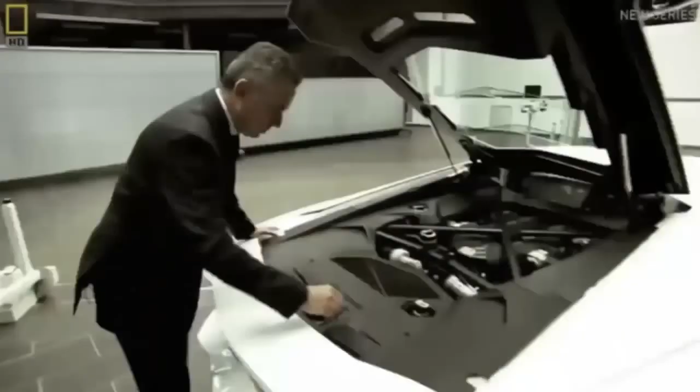It's Aventador's battling spirit that Lamborghini's development team must channel. In 2007, they're faced with the daunting task of creating a supercar that sets the standard for all others. Maurizio Reggiani, head of research and development, realizes that the only way of doing so is to take a step into the unknown.

We had to completely redefine the car, to start from a blank sheet of paper, and on this sheet determine, for each function, all that was needed to ensure that we'd have the best car in the world, to completely redefine what constitutes a super sports car.

To start from a completely clean slate is extremely high risk, and it's up to Reggiani to convince the board that it's the right thing to do.

This was one of the hardest things. Why? Because the project we were presenting had nothing in common with the old Murcielago, not with anything that existed in production at all. So it really meant beginning from scratch, with all the risks that come with that.

But the board decides the risk is worth taking. At the end of the day, they understood very well, because this is, again, about what Lamborghini is all about. Now, to recreate and to be always revolutionary in the approach.

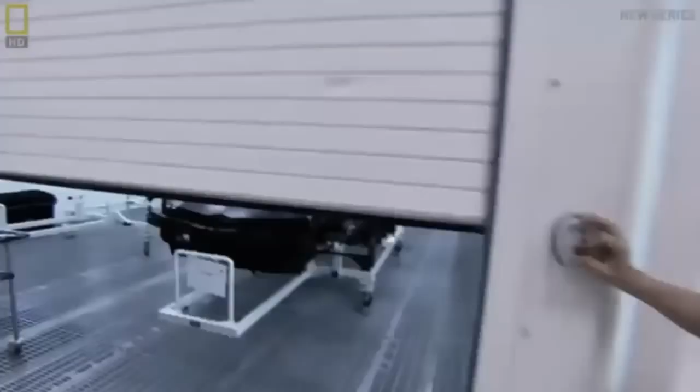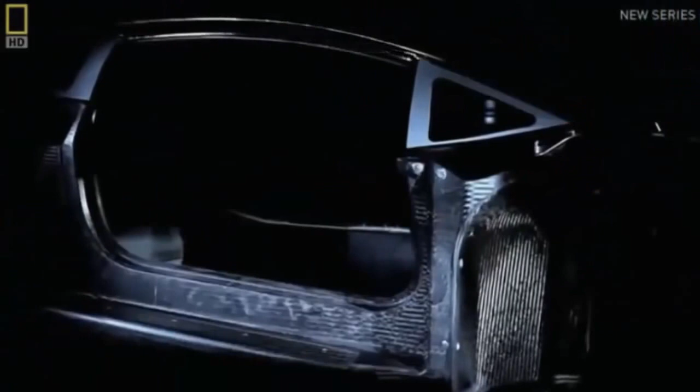The spirit of innovation is apparent in every fiber of the Aventador, as Lamborghini know that the fight to stay at the top won't be won through half measures. And nowhere is that combative approach more apparent than in their focus on lightweight construction, which they've taken to new levels with an entirely new concept for road cars, a full carbon fiber monocoque.

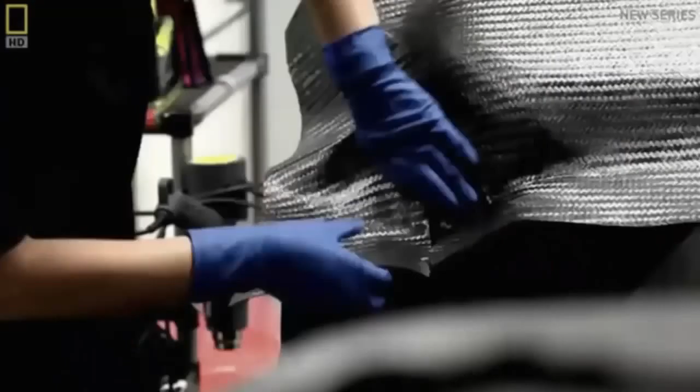These structures are common in racing cars, but the high cost of materials and laborious production methods have made them unavailable to supercar manufacturers, who've had to combine carbon fiber with cheaper, heavier elements, such as aluminium. That is, until now.

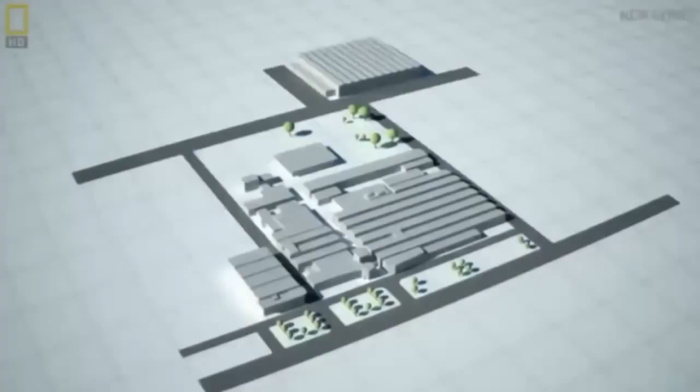The development team has devised a method that allows this race car technology to be mass-produced. But it requires a specialist facility that's up to the task. So in 2009, they build a whole new Megafactory just down the road from the company headquarters, devoted to constructing the Aventador's unique carbon fiber body.

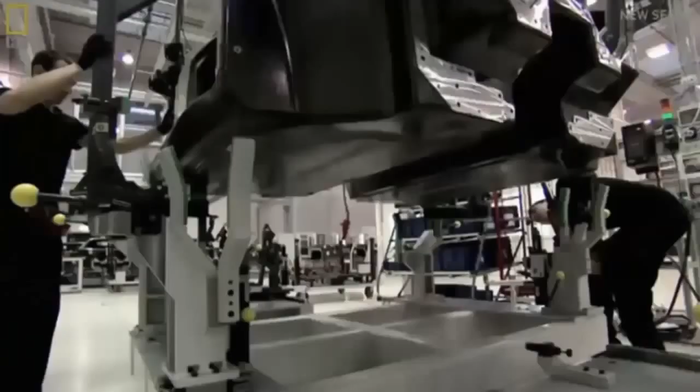Weighing just 147.5 kilograms, it helps make the Aventador significantly lighter than the Murcielago, considerably improving the all-important power-to-weight ratio, and in turn, the handling.

Lamborghini hopes that this innovation will stave off the threat by the new wave of rival companies. Lamborghini knows well what it's like to be the cocky young upstart, vying to unsettle the established names, as that's how it began almost 50 years ago.

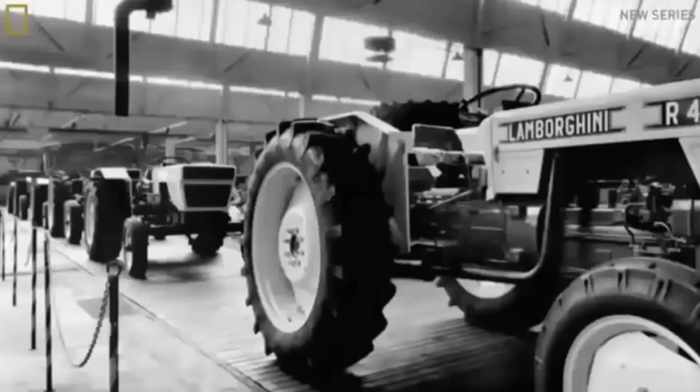The man upsetting the status quo back then was the company's founder, Ferruccio Lamborghini. He had made a fortune from a tractor manufacturing business and used some of his money to satisfy his love of sports cars.

According to Lamborghini legend, when he went to Ferrari to critique some of their parts, his views were dismissed. He got a negative response out of some requests he had and proposals to make a better car. And so he said, I will found my own company and I will create the best super sports cars ever.

He established Automobili Lamborghini in 1963, and for the next few years he toiled furiously to achieve his goal. The cars he created were well received, but it wasn't until the launch of the iconic Miura in 1966 that Lamborghini really made its mark.

The tractor maker had succeeded in breaking into the exclusive world of supercars with his bold new enterprise. Almost 50 years later, despite having joined the ranks of well-established sports car manufacturers, the company still strives to be edgy and uncompromising.

As demonstrated by its approach to the area it believes will define the future of sports car engineering: lightweight carbon fiber construction. The company's relationship with carbon fiber goes back as early as the 1980s, when it created the Countach Evoluzione, a concept car which experimented with the use of composite materials.

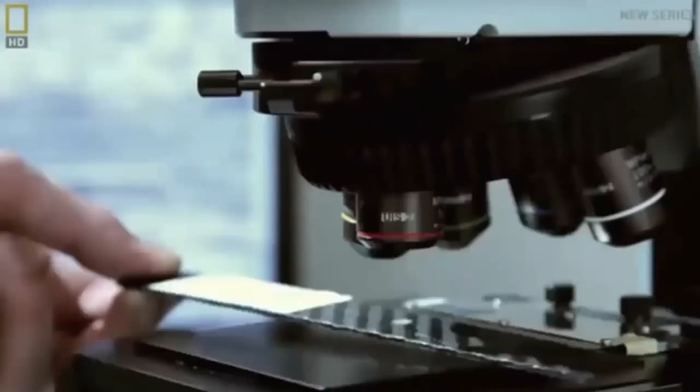It was dreamt up by the newly formed Composites department, whose successor has made many inroads into research and development of lightweight composite materials. And discoveries made here mean that next door, the company has been able to construct its new carbon fiber production facility.

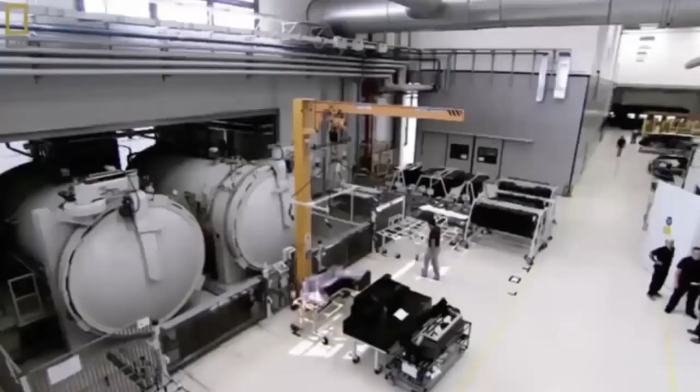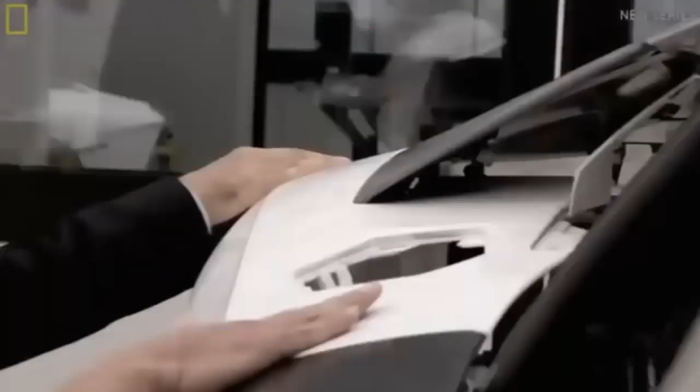The man given this task in 2009 is Ranieri Niccoli, Industrial Director, and he must devise it completely from scratch. When we designed and built this factory, we didn't have any automotive benchmark. We were the only one in the automotive business to build and run this kind of technology.

So they have to look elsewhere for inspiration. We looked to other sectors, for example the aeronautic sector, then we adapted and modified their process to fit a Lamborghini production system in order to build our car.

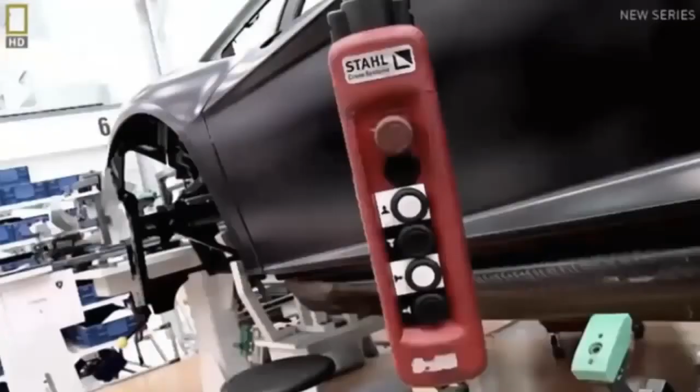The result is 500 square meters of new production space, known as the CFK, devoted entirely to sculpting the Aventador's super lightweight monocoque. Here, 146 carbon fiber specialists toil day and night to create 4 complete monocoques every 24 hours.

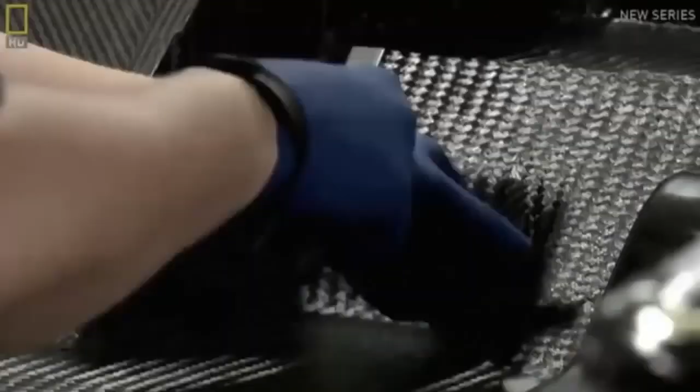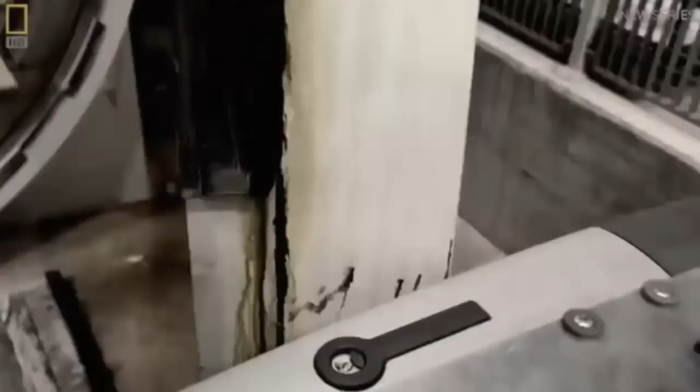To achieve this target, engineers have developed a unique production system. All materials are first cut by an automated machine before being sent for preparation. The material is placed into molds and laminated in a vacuum bagging process which forces the layers into shape, before being cured in a large pressurized oven known as an autoclave.

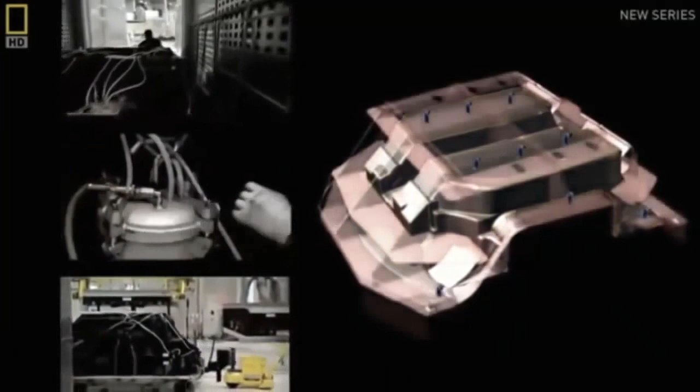Meanwhile, the production of other parts of the monocoque is underway, as operators fine-tune and cut more layers of carbon fiber with the assistance of precision lasers. A special oven is used to inject resin into the carbon fiber mats, which transforms them from soft sheets of cloth-like material to a strong, rigid structure.

After all these processes are over, the 2 key sections are finally recognizable: the base section, known as the tub, and the roof. They're placed in an automated machine, which drills them with holes allowing for attachments to be made later.

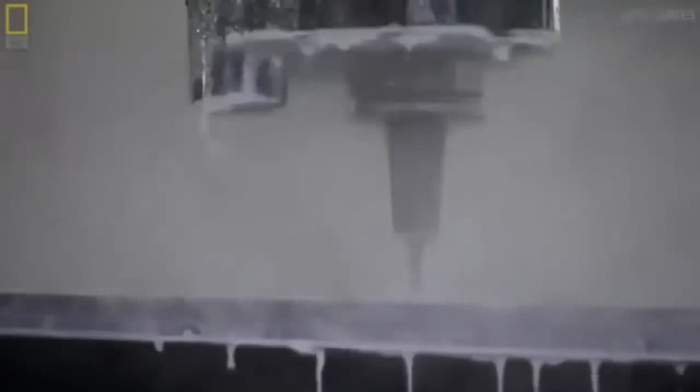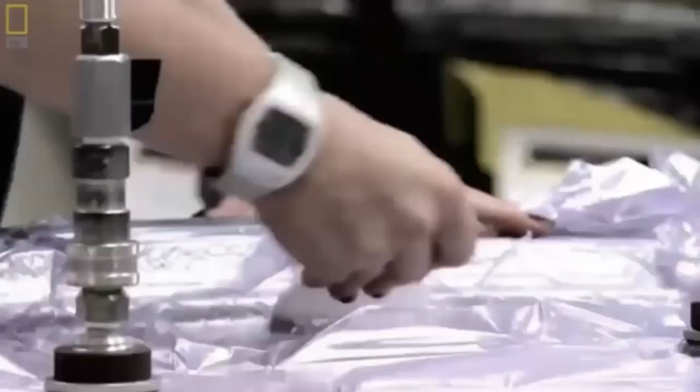Throughout the factory, computer-controlled machines share tasks with human specialists, a partnership that's integral to the Lamborghini production process. The main priority of our plant was to follow the Lamborghini production system, with a high degree of craftsmanship, high degree of skill, people, combined with technology, with an automatization process. This was the main challenge that you can also see in our plant.

Aeronautic-inspired engineering is ingrained in many aspects of the Lamborghini CFK production process, such as this stage, known as the Harmony Hammer Test. In this quality control test, an operator strikes the monocoque section with a specially designed hammer and allows it to vibrate, listening out for areas where air might be trapped in the carbon fiber shell.

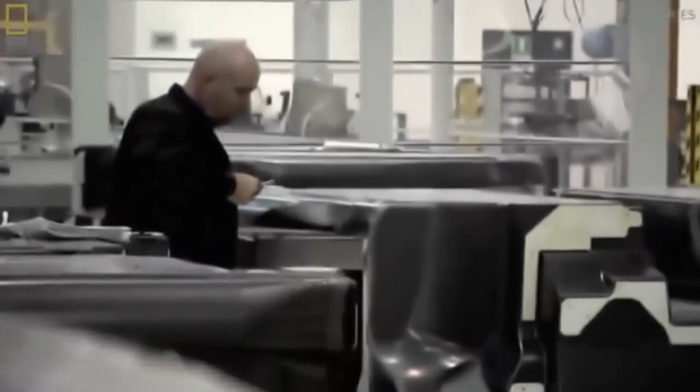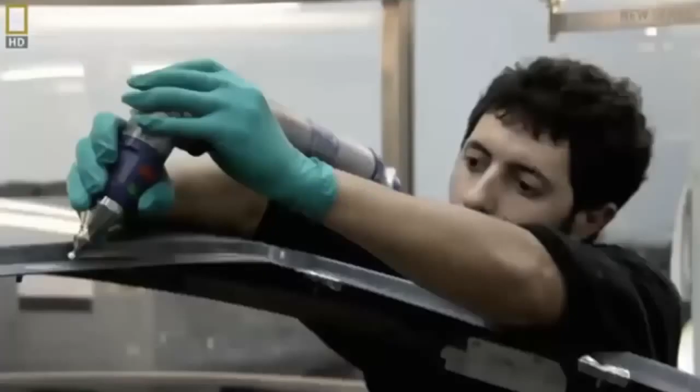Once checked, the parts are ready for their union, as the tub and roof are glued together, turning the monocoque into a single entity. It's essential that the two parts of the monocoque are exactly aligned, so workers use a robotic arm with a 3D laser attachment to check that the sections have been coupled correctly.

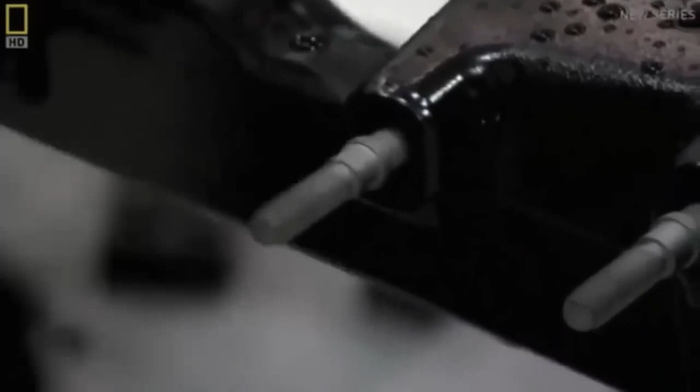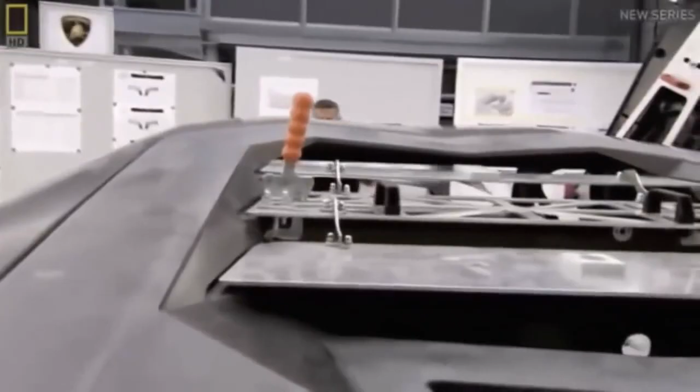Once the correct dimensions are confirmed, metal sections are manually attached to the monocoque, and the body is complete. Then it's into a light tunnel, where surfaces are quality checked to ensure they're in pristine condition before the Aventador's body is signed off for release.

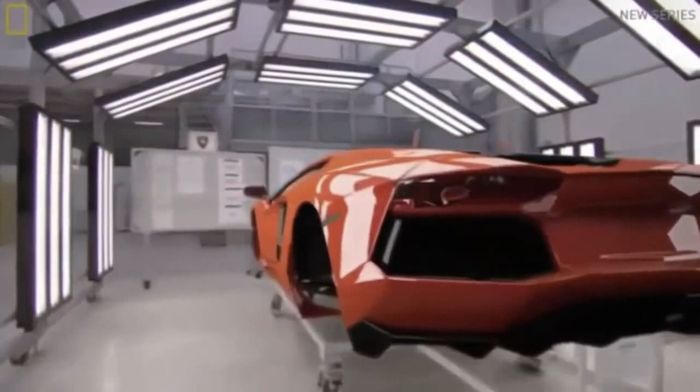As the body is ready to leave the carbon fiber plant, it's possible for the first time to see the Aventador's unique geometry taking shape. This extreme design is one of the most recognizable aspects of the Lamborghini DNA, and it's a tradition maintained and pushed forward here, at Lamborghini's Design Center, or Centro Stile.

The generational leap required of the Aventador does not stop with its engineering capabilities. The look of the car is integral to its ambition.

The design of Lamborghini always has to be revolutionary. You have to understand, if you see a car in front of you, this can only be a Lamborghini even if you don't know the model. So it's very tough for our designers because they have to create something new, but recognizable at the same time.

The job of the design team and its chief, Filippo Perini, is made even tougher during the earliest phase of the Aventador's development, when the board forces them to compete with outside companies to earn the right to design the new model.

At one point, victory comes close to slipping through their fingers. The hardest moment was when, during the project, we realized that we were at risk of losing the project altogether. This was a critical point in the process when we realized that we had to be more innovative, more unconventional, more extreme, unexpected, and uncompromised. It's tough going, but the competitive spirit has a positive effect on the team, and their proposal wins the day.

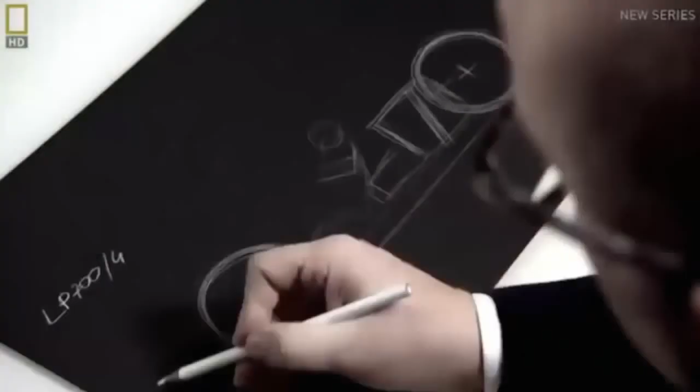Going back now to the actual design, this architecture gave us the unique opportunity to design a car with one single line, this one.

What emerges from this balance is a car whose style is intimately linked with its role as a high-performance vehicle. And its sources of inspiration are many, drawn from one of the team's most important tools, the brainstorming board.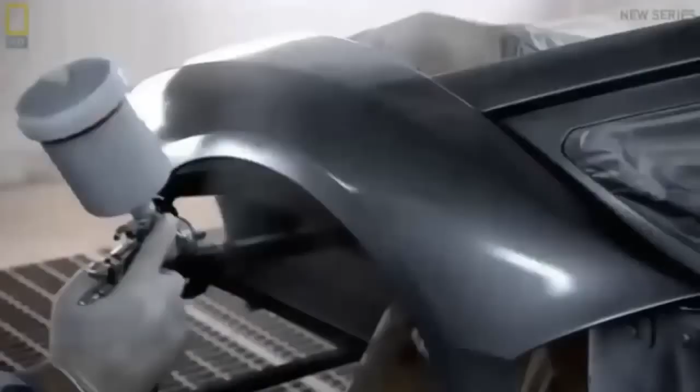After the CFK, it's taken away to be given one of its most important characteristics: its color. Here at the paint shop, it's lavished with the kind of attention that most cars could only dream of. One of 13 colors is hand-sprayed over every part of the bodywork. 27 pieces are given individual attention by a specialist, who covers them with 8 liters of paint.

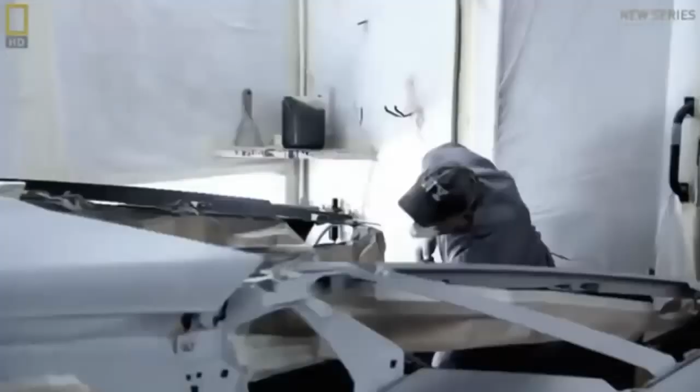The Aventador, with its extreme lines, requires more man-hours than any other Lamborghini in the past. And of course, every phase is carried out manually, as only human analysis and dexterity can ensure that each surface is covered with exactly the right amount of paint.

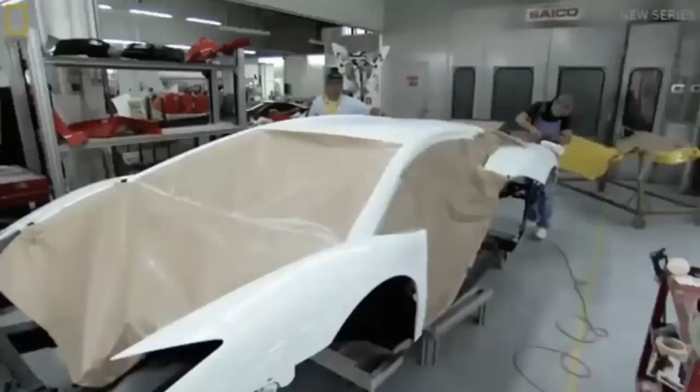In total, 200 man-hours are spent on every single Aventador while at the paint shop. 3 whole days are spent on polishing alone. After being carefully sanded, the Aventador is repeatedly buffed with special materials.

After that, it's sent for another quality check in a light tunnel. For 2 hours, an inspector walks around the bodywork, checking for color perfection. If there's any inconsistency, the offending section will be sent back to be repainted.

Underpolished areas are also marked out for extra attention. These hundreds of hours of devotion end when the exacting standards of the inspector are met, and the car is released for the next phase of production: the assembly line.

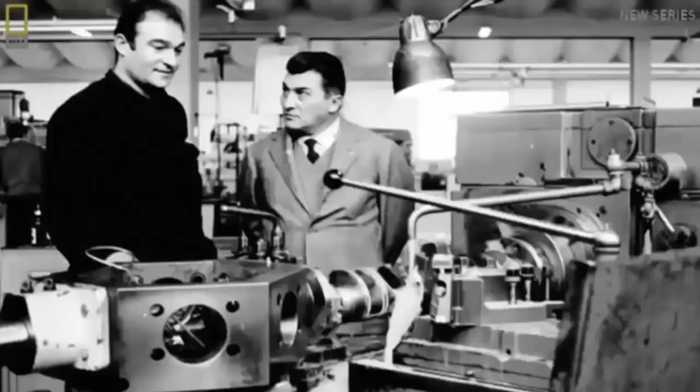The assembly line for the Aventador lies just meters from the original site of the Lamborghini factory, built almost half a century ago. Back then, its founder, Ferruccio Lamborghini, was known for his hands-on approach, frequently seen on the factory floor, directing operations. He focused on the skill of the mechanic as being key to the success of the product, and that attitude still permeates the site today.

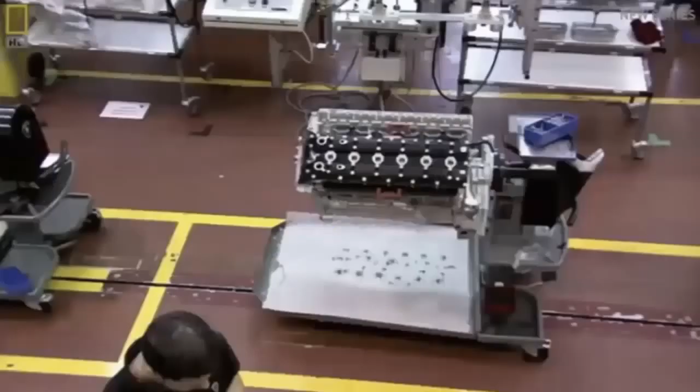Here, 50 workers spread over 11 workstations are responsible for the task of assembling Lamborghini's latest model. The man in charge of making sure things run smoothly is production manager Andrea Costantini. He sees his highly trained workforce as a direct link with the roots of the company.

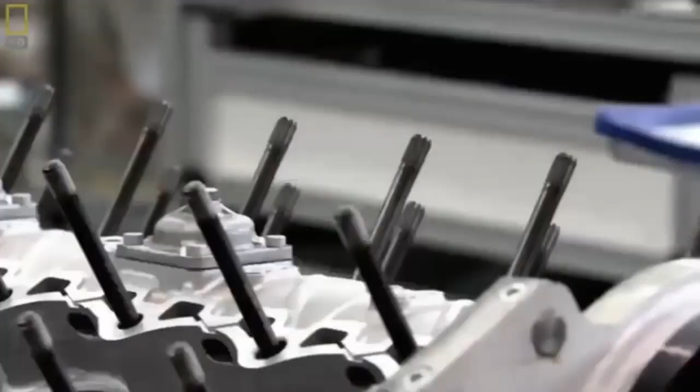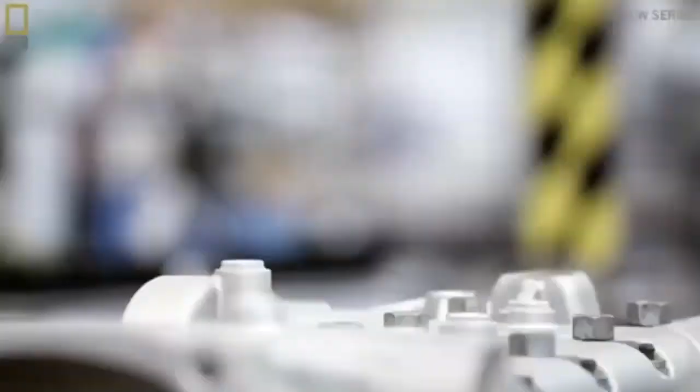In this case, the workers are the most trained. We take these guys directly from the best schools of mechanics in Emilia-Romagna, here in the surroundings of Lamborghini, and we train them for more than 2 years to allow them to be really the best experts in mechanical engines. So everything is done manually, still like we did since 1963, since when Mr. Ferruccio Lamborghini, the owner of Lamborghini, started.

In an age when machines dominate production in almost every field of manufacturing, loyalty to the art of skilled manual labor is not often seen. But here it's believed that when it comes to reliability and precision, humans still have the edge over machines.

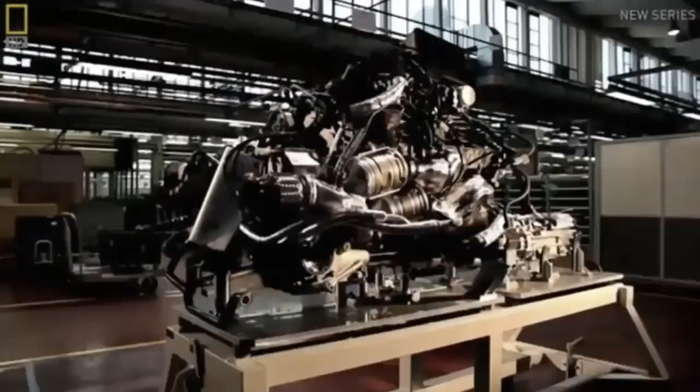And nowhere more so than in the engine assembly station, for this is where the heart of the Aventador is put together: the Lamborghini V12. At a time when many sports car manufacturers are shying away from using the 12-cylinder engine, Lamborghini is resolute. The V12 always has and always will provide the power for their flagship models.

The V12 for Lamborghini is part of our DNA. Everything for us is rooted in our history, which started with the 12-cylinder engine.

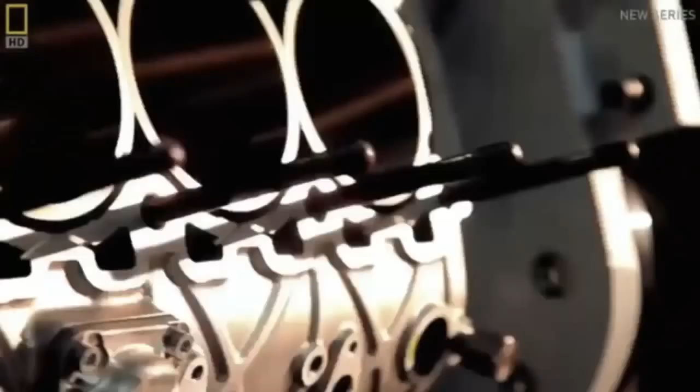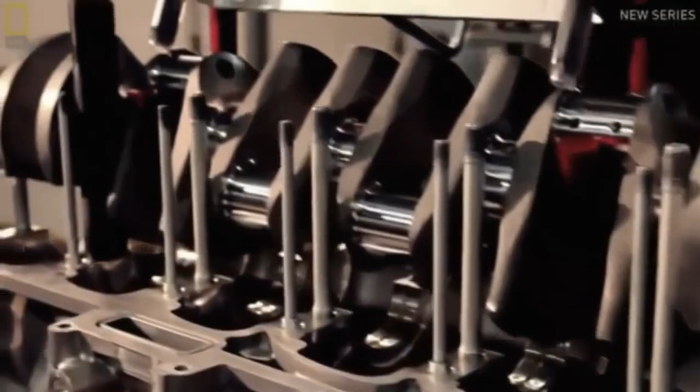With 6.5 litres of displacement and 700 horsepower, the Aventador's V12 is about as gutsy as it gets. But as with everything else, it's had to move with the times. Lightweight, again, is the order of the day. Despite the fact that this engine is more powerful than the Murcielago's, it weighs less, just 235 kilograms, by using aluminium silicon alloy on components such as the crankcase.

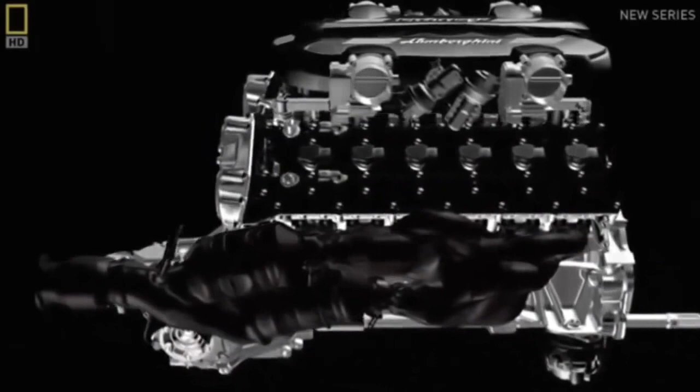The main purpose of the V12 is to power the Aventador, but when linked with the car's exhaust system, it takes on another significant role: creator of the mighty Lamborghini Orchestra.

The V12 motor represents what for us is the sound, the music of the car, the way in which it's presented to the public, the way she makes herself heard and announces her arrival.

To achieve this, we invest a great deal of time in simulations. We simulate the sounds that we can have, and then we experiment first in the lab and then on the vehicle itself.

This 12-cylinder symphony has a full range, from a moderate rumble through the town at low revs to the screaming crescendo of maxed-out gear shifts.

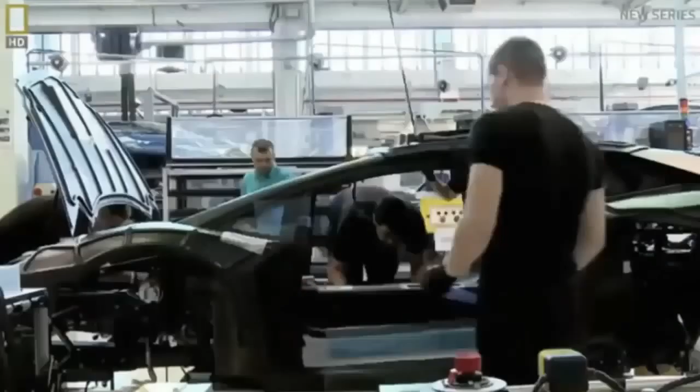While the V12 is being assembled, the body of the Aventador arrives on the assembly line, ready for conversion from an empty shell into a fully functioning supercar. As the company's latest foray in a highly competitive market, the Aventador needs a production process with efficiency to match.

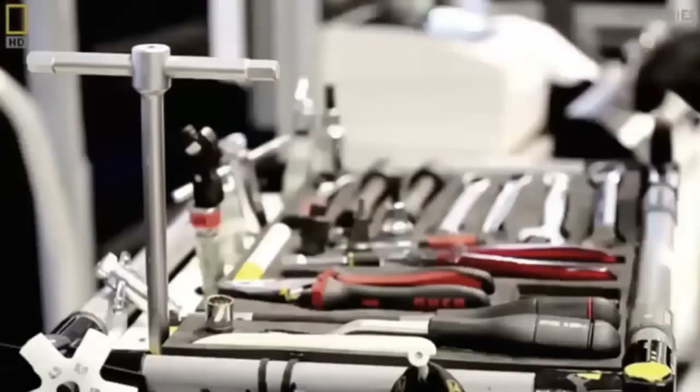The drive for improved efficiency was for sure coming from the market, from our competitors. We have always to be the best, to be number one in terms of product, in terms of performance, but also in terms of quality. So to become and to stay number one, we have always to have a huge increase of efficiency, a huge increase of quality in the assembly line and in all the processes inside the factory.

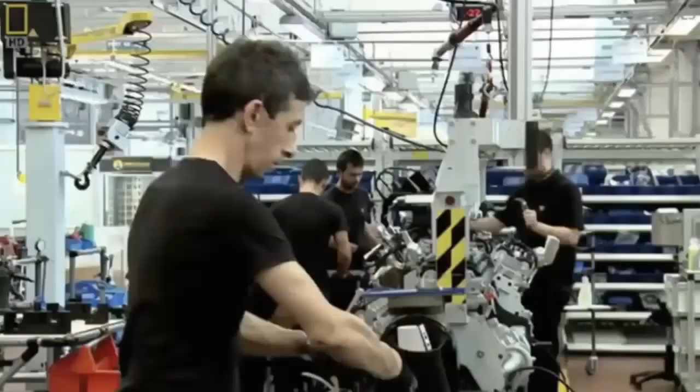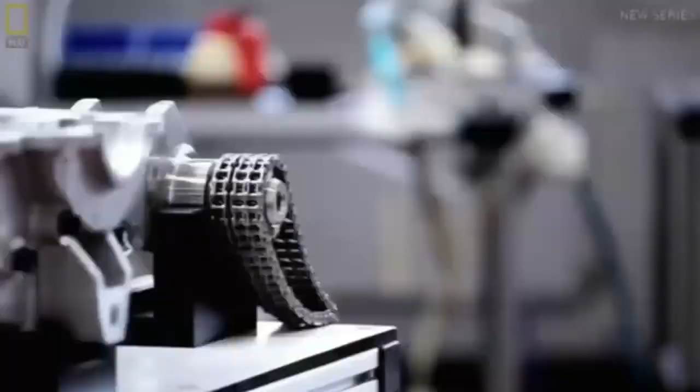The company's output of luxury vehicles is a mere fraction of what the large-scale manufacturers produce for the mass market, with around 800 Aventadors due to be created in the first year. But that doesn't mean the factory can't be run to similarly exacting standards of efficiency as the largest groups. Workers have just 1 hour and 40 minutes to carry out a whole range of highly meticulous tasks. If they take too long, the whole assembly line will stall, targets will be missed, and costs will mount up.

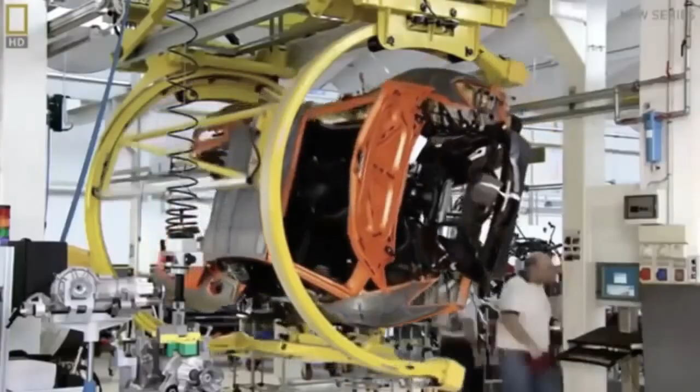The countdown starts here at the first station. Work is carried out on the underbody and front differential by lifting and rotating the vehicle to give the mechanics easy access.

Before being readied for what is arguably the most significant stage in the Aventador's production, the insertion of the colossal V12 powertrain into the car's chassis.

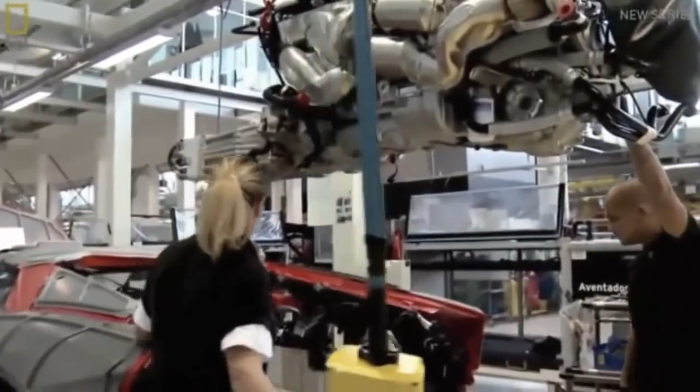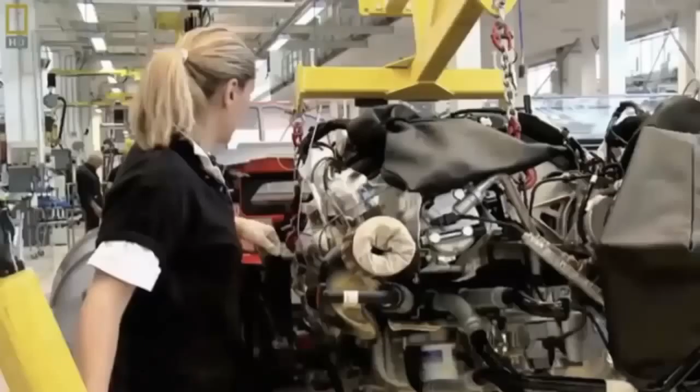Here we are in the most critical assembly station of the Aventador assembly line. Here we have the assembly of the engine, the heart of the car, basically inside the bodywork. We call it the marriage between the car and engine. This marriage of elements is when the development team's work of the past 4 years comes together, where design and engineering combine.

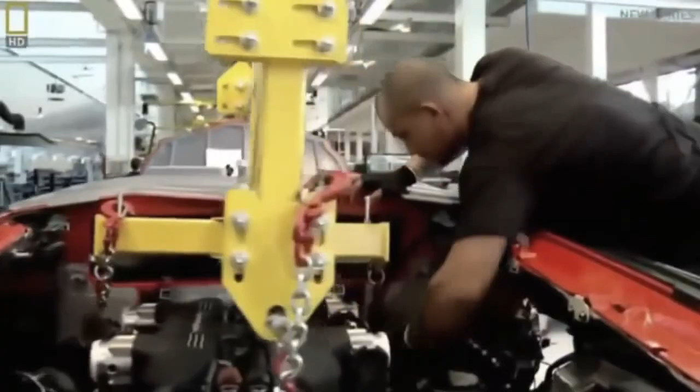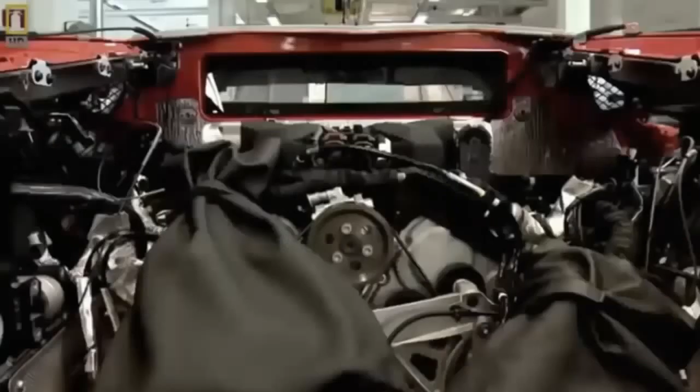Here, as with all other phases of production, the specialists of each station take full responsibility for their section. You can see the workers assign each and every single connection to be sure that each and every phase was done in a good way. The risk in this case is the car is not working properly afterward during the road test, and could be a big problem for a customer using it. As you can see, this is absolutely not done with equipment, a robot or other automatics, but is done manually.

Step by step, the car is taking shape, being molded from empty shell into the fully formed supercar that will leave the factory.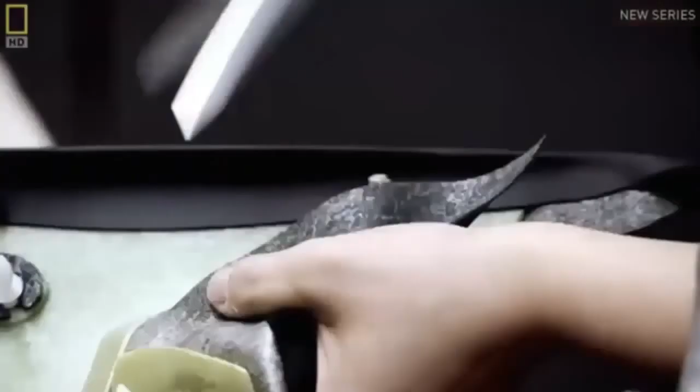And while the assembly line is in full flow, next door, the second critical aspect of the Aventador is being prepared: the interior. It's in this sector of the factory that a customer's individual preferences for the way their car looks can really be indulged.

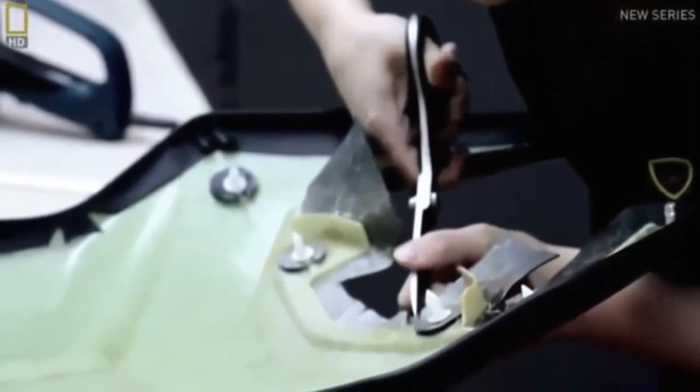About 100 square meters of leather hide in 9 different colors arrives each day. Attention to detail is essential to pass the stringent quality control checks. Here, a leather specialist looks for minor imperfections in the hides and marks them up wherever found. An automated machine recognizes the marks and cuts around imperfections, leaving only pristine material for the Aventador's interior.

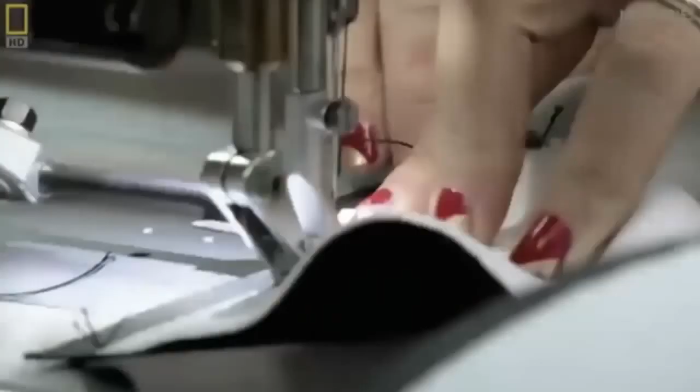The leather is then taken to specialists with 3 years training to be stitched and glued onto the various parts that make up the Aventador's interior.

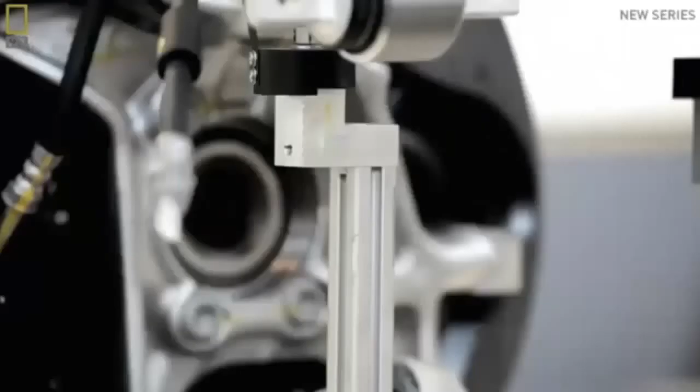Back on the assembly line, one of the Aventador's most important pieces of kit is ready. This simple-looking item is the suspension, but its apparent simplicity belies the creativity that goes into its engineering. The Aventador uses a pushrod suspension system direct from the world of Formula One race cars. It works by keeping wheel control and damper elements separate.

By keeping the damper elements inboard, the pushrod system allows the wheels to maintain maximum contact with the road when going round bends, massively improving the handling on corners, a must for a car that can hit speeds of up to 350 kilometers per hour.

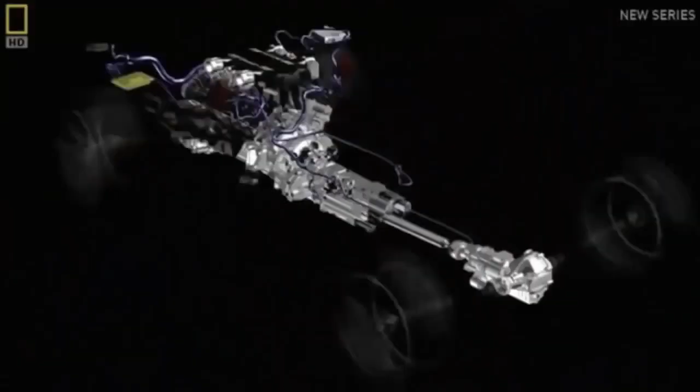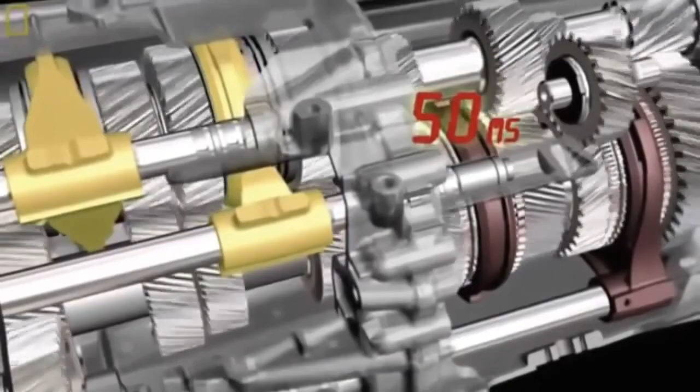But it's what's happening away from the eye that's most remarkable: the Lamborghini patented independent shifting rod transmission. This technology allows the shifting process to run virtually in parallel. While one shifting rod is disengaging one gear, the second shifting rod can already engage the next gear, creating a shifting time of just 50 milliseconds, not far off from Formula One transmission times, which average around 30 milliseconds.

Such technological innovations are only made possible by extensive testing of the vehicle during the development phase. And possibly the most critical moment for the engineers is when the prototype model takes to the track to be put through its paces for the first time. For the Aventador, this happens back in 2008.

Then we found ourselves at the first track run of the Aventador, which generated an indescribable emotion. At night, on the Nardo track, a small group of people seeing a creature move for the first time that had needed years and months, nearly a year and a half, before it was able to move. And the perception, after these first laps, based on what our test drivers told us, was that we'd created something that really was the new landmark for super sports vehicles.

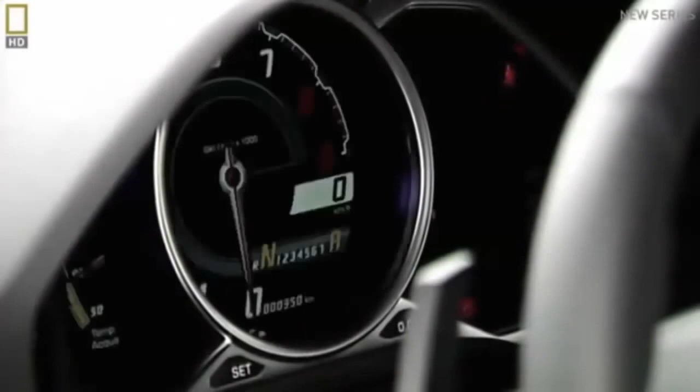The man behind the wheel of that prototype Aventador was Lamborghini's chief test driver, Giorgio Sanna. He's been a key member of the Lamborghini development team since 2001. A dream job for many, but the thrill of driving prototype supercars comes with certain pressures.

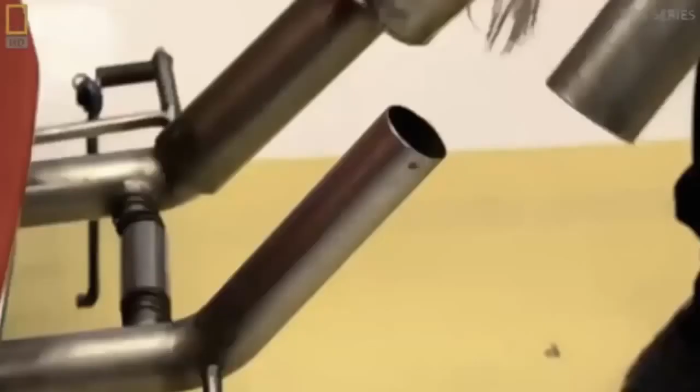As important as the assembly process itself is the series of quality control checks that the car must undergo once it's complete. Any minor imperfection could impact on the car's performance, and its safety elements in particular must be rigorously tested.

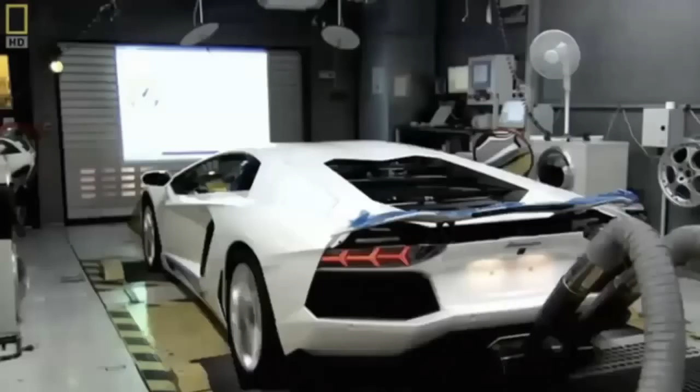The brakes are checked in a room where the car is driven at speeds of up to 140 kilometers an hour on a rolling road. The Aventador's carbon ceramic brakes can take it from 100 kilometers per hour to a complete standstill within 30 meters. And in theory, the Aventador is capable of going from 0 to 100 and back to 0 in less than 4 seconds.

Data from the anti-lock brake system is transmitted wirelessly to two dishes, then into a computer mainframe for analysis.

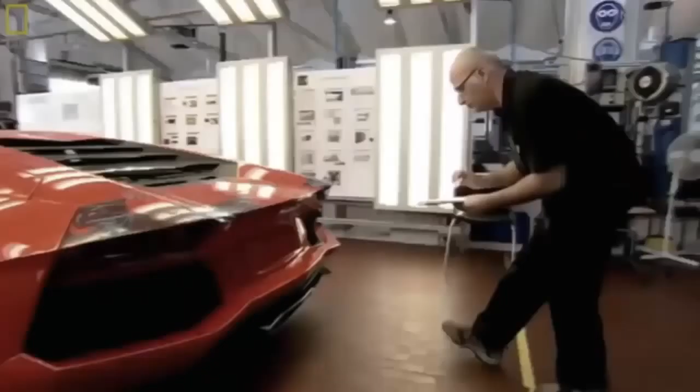The final task of the factory workers is to scrutinize the car in a light tunnel to ensure that aesthetic standards haven't been affected during the assembly process.

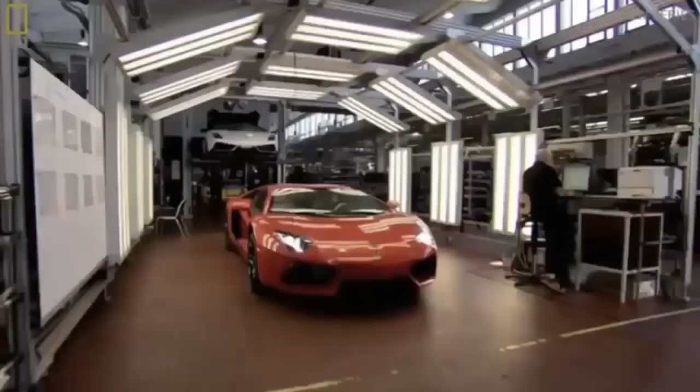But before it can be shipped to whichever global location it's destined for, each Aventador must undergo one final phase: the all-important road test. Every car is given its own test drive around the local area. They're put through their paces to check that their complex engineering is absolutely in tune. And it's here for the first time that the cars are enjoyed as they were intended to be. Only once the test driver is satisfied that all aspects of the Aventador have been properly configured will he sign it off for release to the outside world.

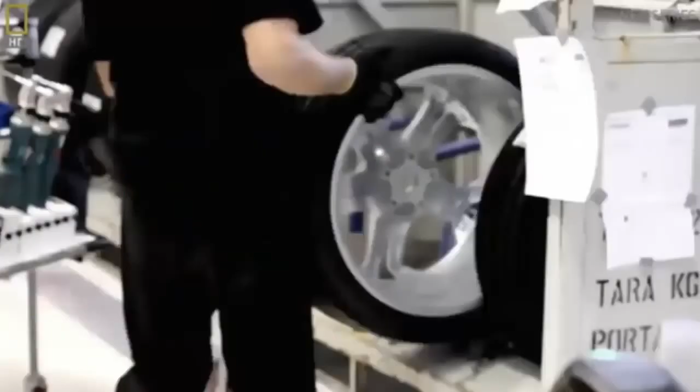The Aventador has come a long way since the brief was first given for its creation in 2007. Years of struggle from designers, engineers and mechanics have culminated in a vehicle which looks likely to remain as Lamborghini's flagship model for some time to come. The risk of starting completely from scratch has paid off. And with the new era underway, complete examples of the Aventador are rolling off the assembly line at a rate of 20 each week.

But for Lamborghini, the challenge does not end here. As the company celebrates its 50th anniversary in 2013, it will be thinking of new ways in which it can push the boundaries of automotive engineering. Stephan Winkelmann suggests that a different era might be around the corner.

Our two-model strategy for the future will not be enough, so we decided to step into a third model. It will be a Lamborghini which you can be able to drive every day, so a very usable Lamborghini, but it will always have the DNA of the true Lamborghinis inside.

A Lamborghini for everyday use may be on its way. But until then, the Italian supercar manufacturer will focus all its efforts on producing vehicles which aim to keep them ahead of the competition. And right now, the car leading that charge is the Aventador.